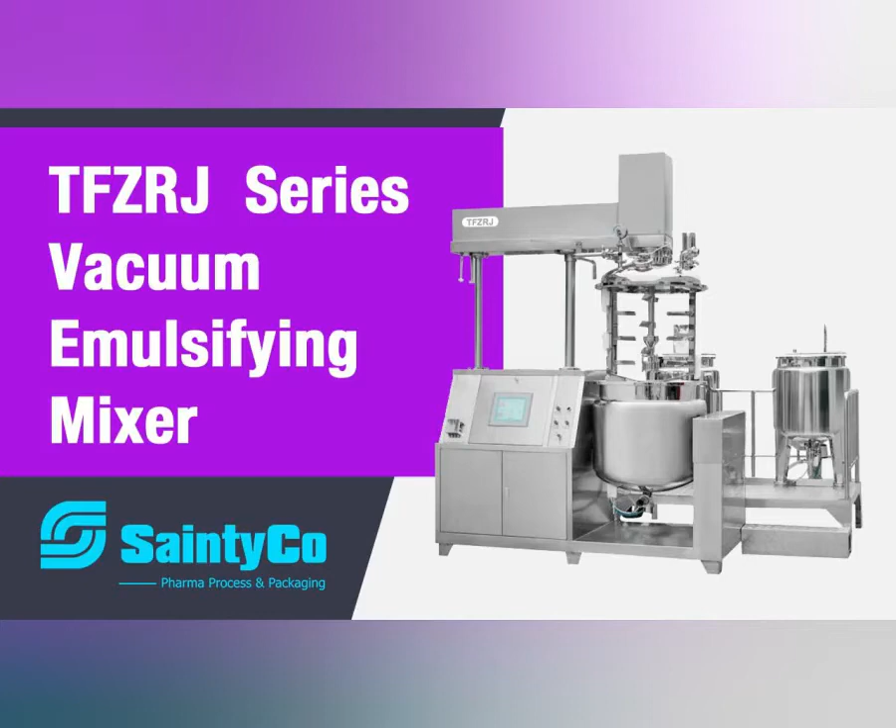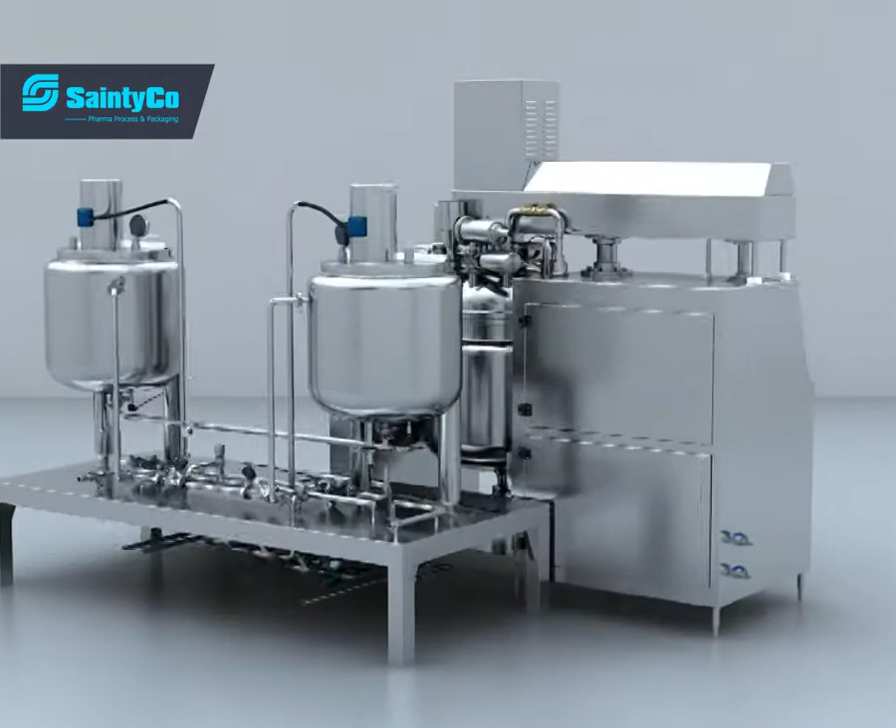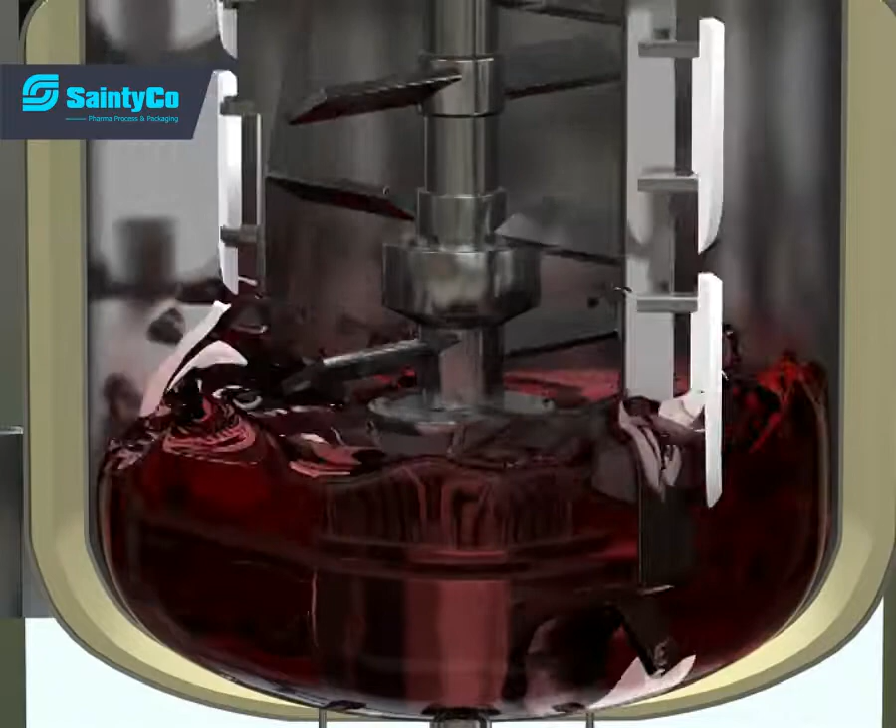The machine has easy operation, steady capability, good homogeneity, high efficiency, solid structure, small volume, high automation level, and is easily cleaned.

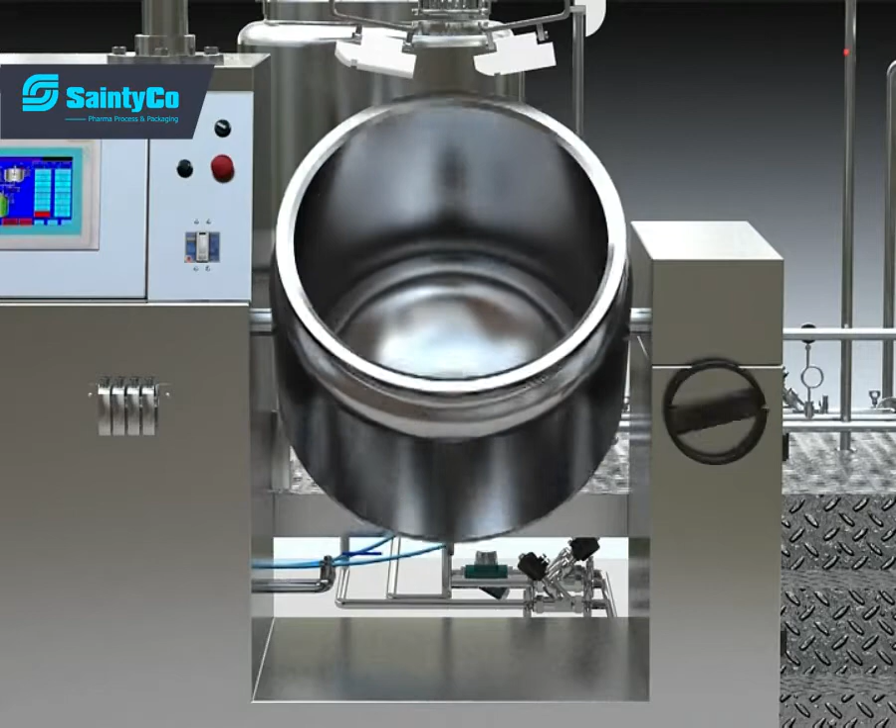The machine is made up of pre-treatment tank, vacuum emulsification blending tank, vacuum pump, hydraulic system, pouring out system, electro control system, and worktable.

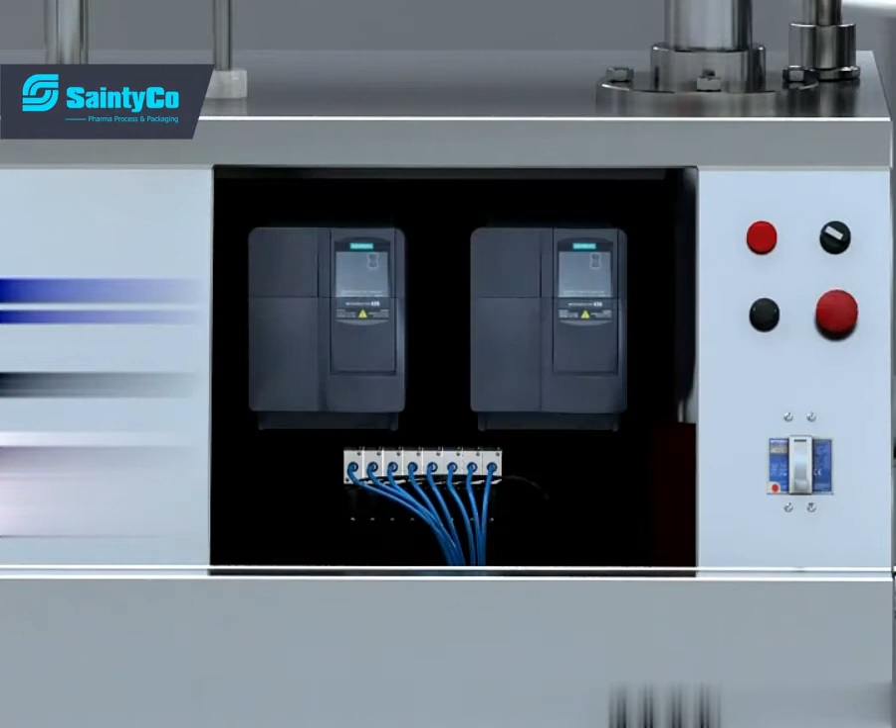The material is made from SUS316L material. Mirror finish of the inside surface is 300 mesh.

Composition of the emulsifier: 1. Emulsifying mixing tank. It has the structure of 3 layers, up and down sealing heads. The down sealing head is connected with the tank by flange, and the thermal protective layer adopts PU foam technique.

There is a high-speed emulsifying mixing device and forward and reverse low-speed mixing device in the tank. At the bottom of the tank there are pneumatic discharge valve and temperature sensor.

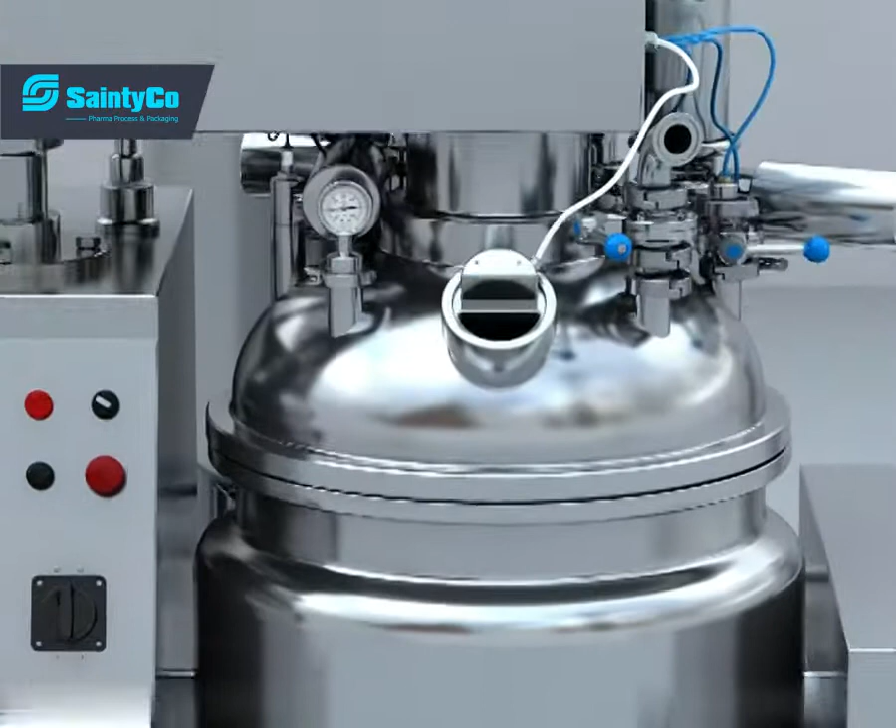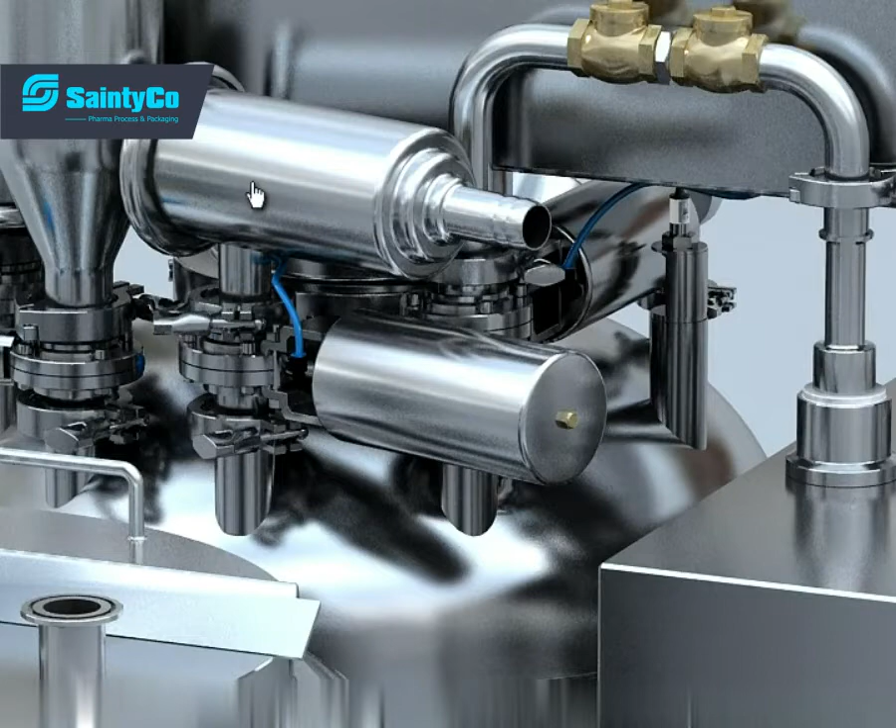On the upper sealing head, there are vacuum sensor, diaphragm vacuum meter, sight glass, CIP purge valve, pressure valve, respiration device, accessories feeding valve, liquid feeding valve, and pneumatic valve for vacuum.

When loading the material to the tank, the low-speed mixer starts mixing the material in forward and reverse directions. The forward blade will make the material go up and the reverse blade will make the material go down. At the same time, the scratch blade will scratch the material which sticks to the tank wall.

Materials are loaded into the emulsifier from the top and bottom of the tank, and will be swung out in the middle by centrifugal force. At the same time, the materials will be cut into very small granules under the effect of the emulsifier head and emulsifier cover.

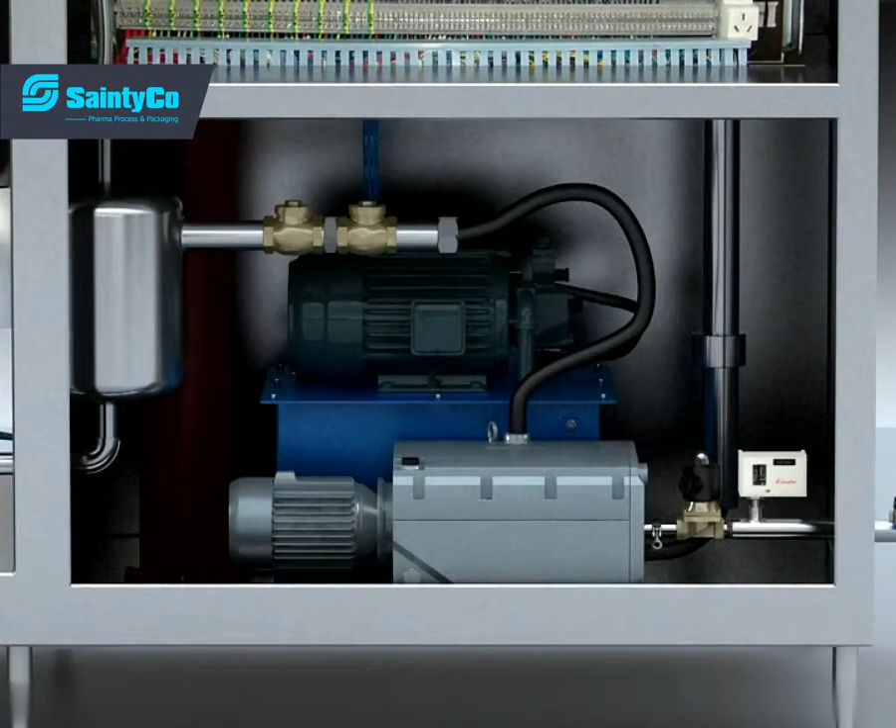2. Vacuum system. It is made up of vacuum pump, vacuum buffer tank, check valve, vacuum meter, water pressure relay, vacuum pneumatic valve, and water electromagnetic valve.

At the beginning of the process, the pressure at the water inlet and air inlet is around 1 atm. When the vacuum pump starts, it will draw the air in the tank through a pneumatic valve, check valve, and vacuum buffer tank. The emulsifier will not cause any foam under vacuum state.

The vacuum meter displays the vacuum degree of the tank, and the vacuum protective sensor will keep the liquid pressure in normal state. 3. Hydraulic system.

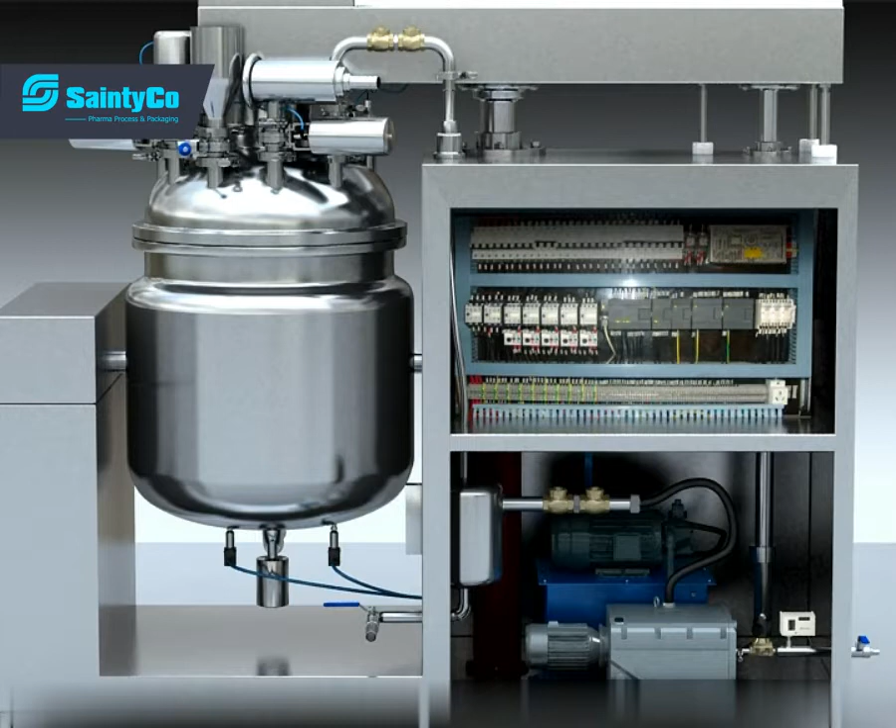It is made up of hydraulic pump, hydraulic cylinder, reversing solenoid valve, overflow valve, upper limit switch, lower limit switch, discharge protection range, and safety switch.

If the emulsifier tank is reset and there's no vacuum in the tank and the safety switch is in this position, then upper and lower sealing heads will start to move up and down.

4. Discharge system. It is made up of discharge hand wheel, worm screw, and worm wheel.

When the emulsifier gets to the upper limit, forward swing the discharge hand wheel until the tank leans to the point that the upper is lower than the bottom discharge limit. Then reverse swing the discharge hand wheel, and the tank will reset to the normal state.

5. Blending system. It is made up of working platform, oil tank, and water tank. The structure of the oil tank and water tank is made of 3 layers.

Upper half open lid, bottom sealing head. The bottom sealing head is connected with the flange-type tank, and the thermal protective layer adopts PU foam technique.

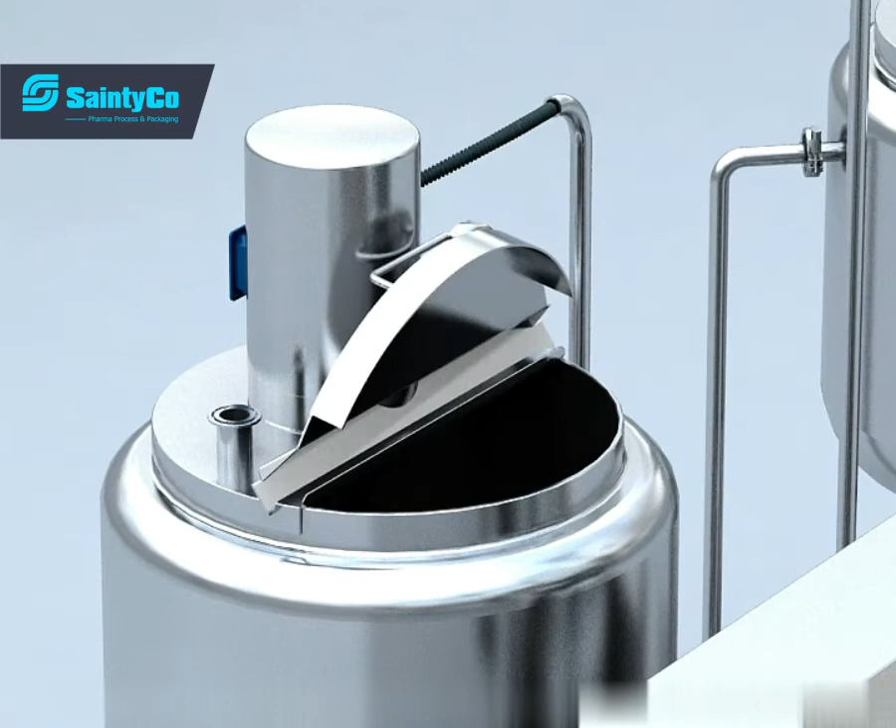After opening the half-open lid, the material must be loaded into the oil and water tank, and then it will start to mix. 6. Pipeline control system.

It is made up of high-pressure stainless steel tube, safety valve, manometer, pneumatic valve, and bleeder. When the steam and compressed air is normal, if the tank is heated, then the condensed water will be discharged from the bleeder after it goes through the pipeline, valve, and the jackets of the tank.

If the tank is cold, then the cooled water will be discharged by the discharge outlet after it goes through the pipeline, valves, and lower hull of the jacket of the tank.

When discharging water, compressed air enters from the jacket of the tank and forces out the water in the jacket. Heat, cold, and discharge functions cannot be active at the same time.

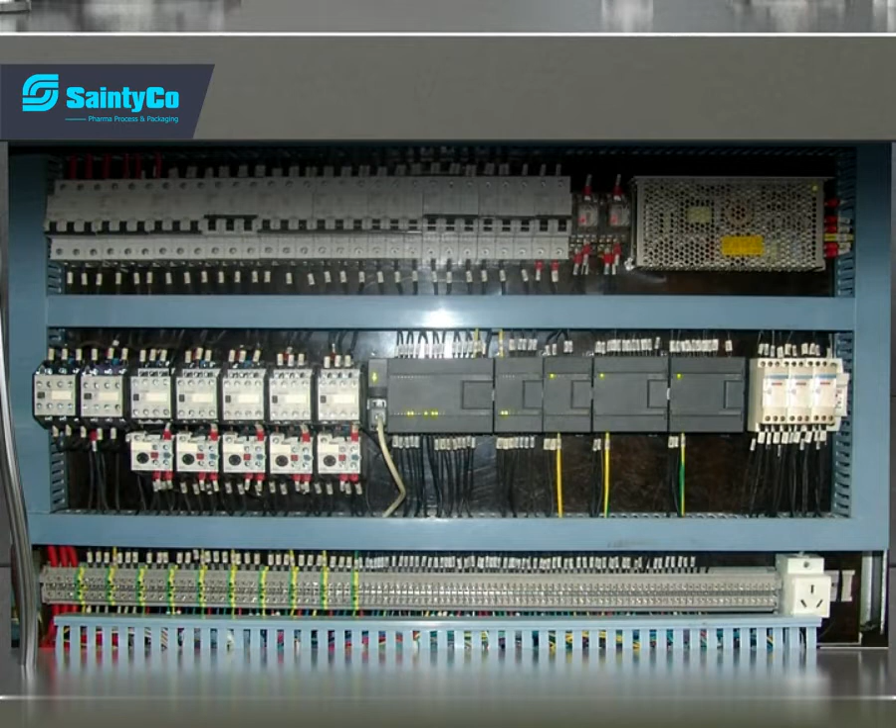It can only process one function at a time. 7. Electric control system. It is made up of PLC, circuit breaker, heat protector, touch screen, frequency converter, temperature transducer, electromagnetic valve. The touch screen will display control screen, parameter set screen, parameter updating screen, temperature curve screen, warning screen, password protection.

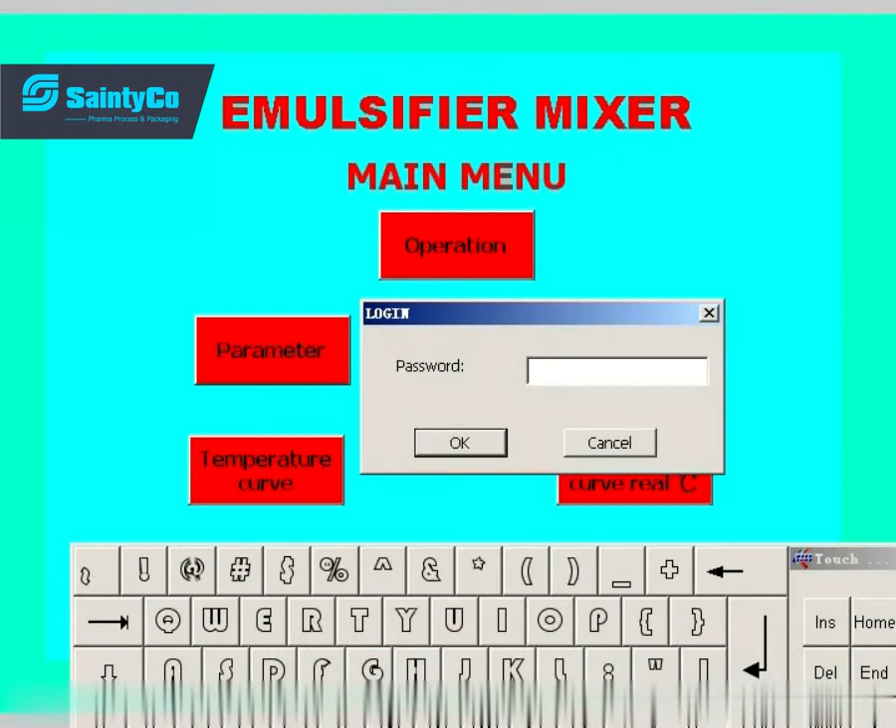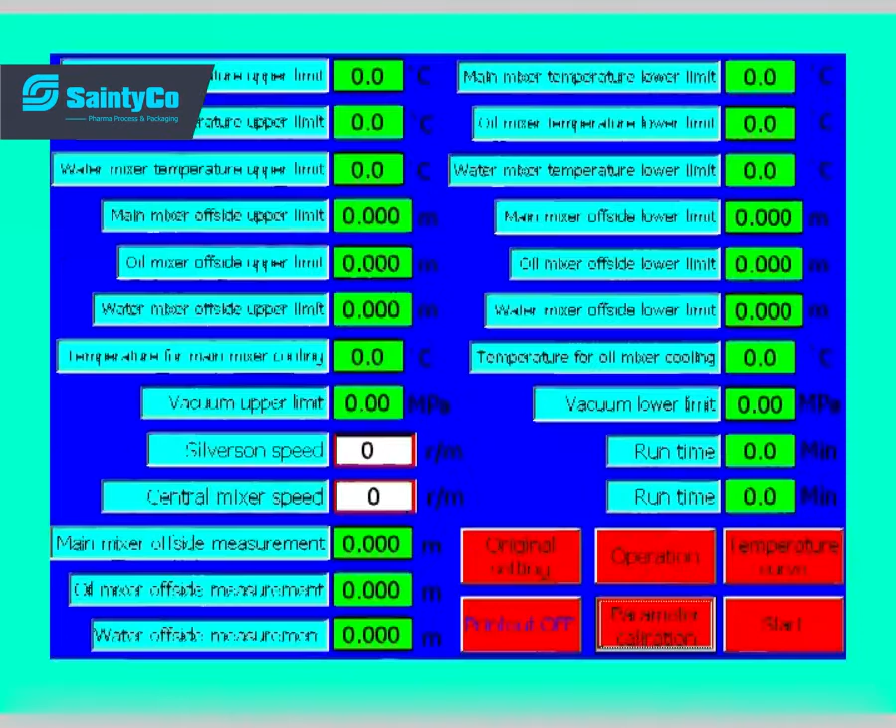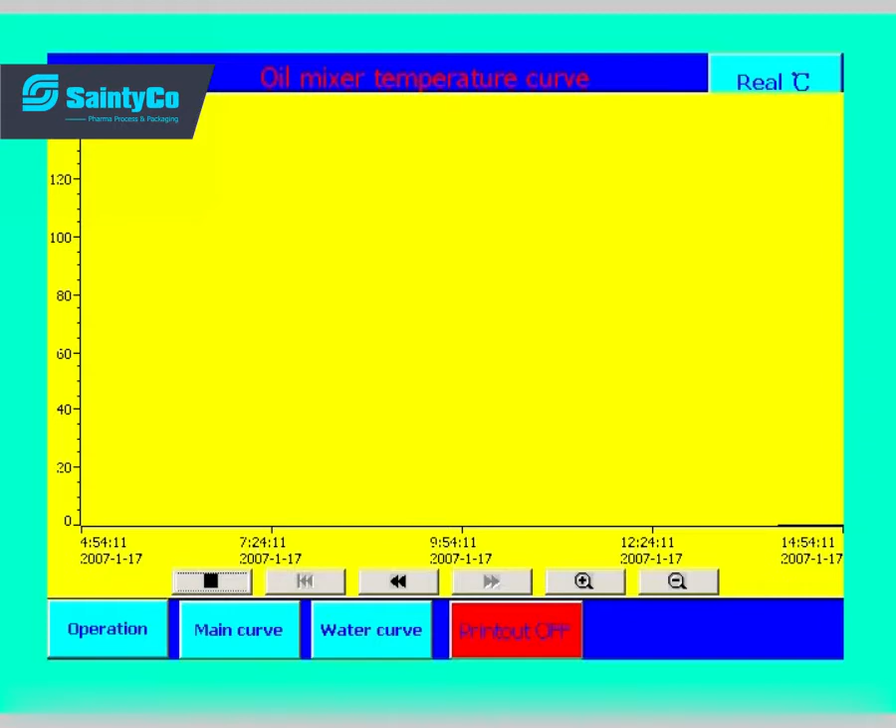On the function screen, we can enter into any screen and make any function control. Parameters can be easily changed from the parameter setting screen. Other parameters and functions are also displayed in the HMI, for example, review of current parameters, temperature of the tank, alarm record, and plotting of time temperature curves.

Installation. 1. Put 6 main machine pads well after the main machine and the working table enter the workshop, and put the main machine on the pad. Then use a level bar to adjust the level of the main machine.

2. Put the working table behind the main machine and put the stainless steel ladder by the side of the working table, and the set of the ladder and the table should be in one line.

3. Connect the stainless steel pipe and compressed air pipe between the main machine and the working table and the wire between main machine and preparation tank room. And connect the steam pipe, water inlet pipe, water discharge pipe, condensed water discharge pipe, compressed air inlet pipe, and wire between the workshop and the emulsifier.

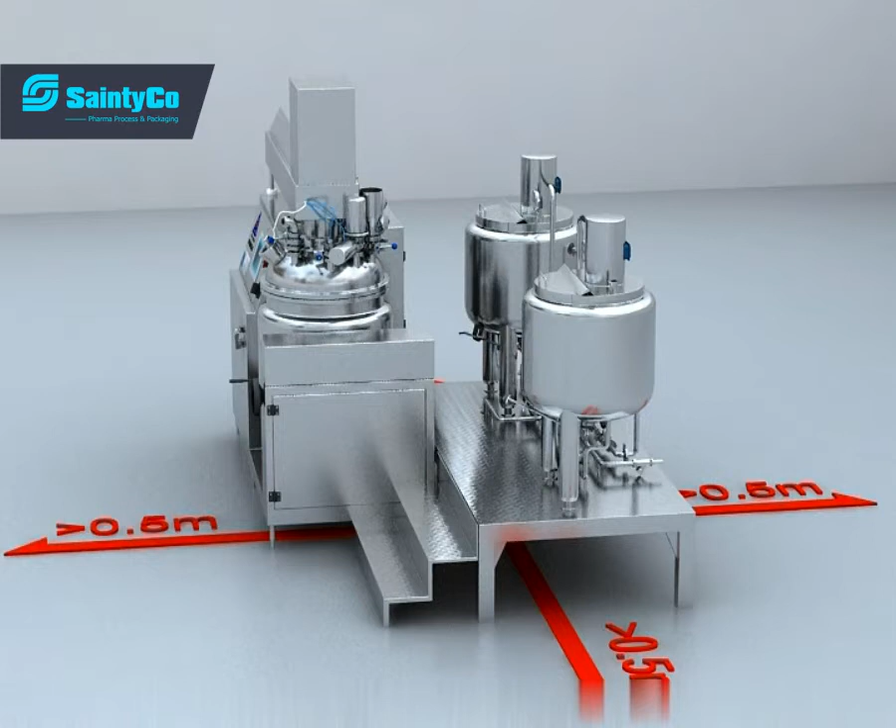4. The emulsifier should keep a distance from the wall at least 0.5 meter, 1.0 meter if possible, in order to do maintenance and ease the clean process.

Operation instruction. 1. Set all parameters on the touch screen after turning it on according to the required batch process.

2. Pre-treatment of material. Load the material to the oil tank or water tank manually according to the required batch process, and then touch the oil tank heat on or water tank heat on, on the touch screen, and the oil tank or water tank will begin to heat.

Touch the oil tank mix on or water tank mix on, on the touch screen, and the oil tank or water tank will begin to mix, and the material to dissolve. Turn off the oil tank or water tank heat and mix button after the pre-treatment, and continue to the next procedure.

3. Material feeding to main tank. Check if the material after being dissolved meets the requirement of the batch process, and then touch the vacuum pump on, on the touch screen.

When the vacuum degree reached -0.06 MPa, open the filling valve of the main tank and the valve at the bottom of the oil or water tank, and the material will be sucked into the main tank under the negative pressure of the vacuum. Close the feeding valve of the main tank and the valve at the bottom of the oil tank or water tank.

Then touch vacuum pump off on the touch screen, and then start low-speed mixing on of the main tank on the touch screen. It will enter to the third procedure.

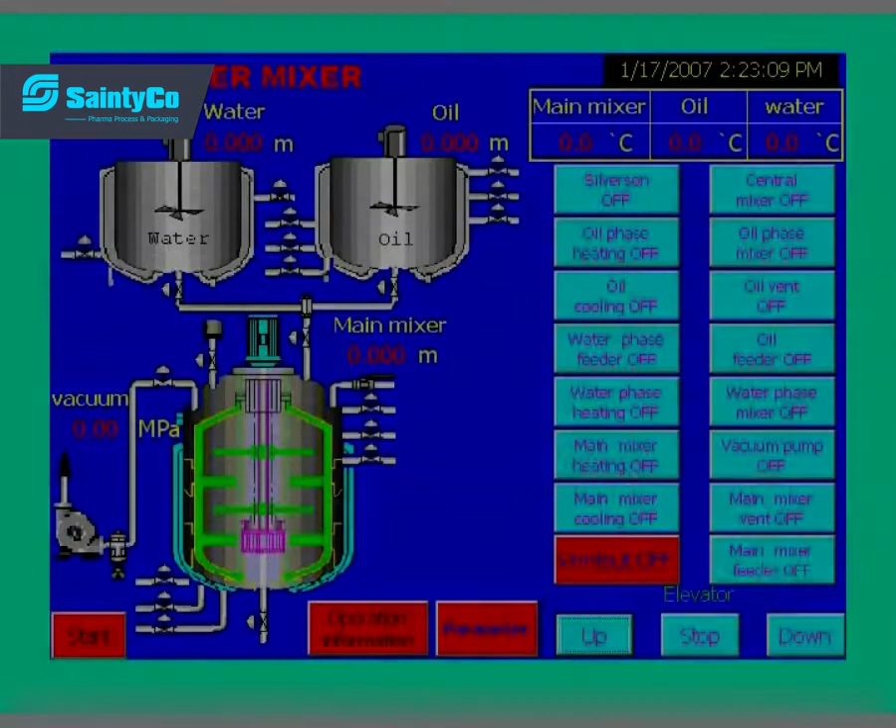4. Feed powder into the main tank. Touch vacuum pump on button on the touch screen and start the bottom valve of the main tank when vacuum degree reached -0.06 MPa.

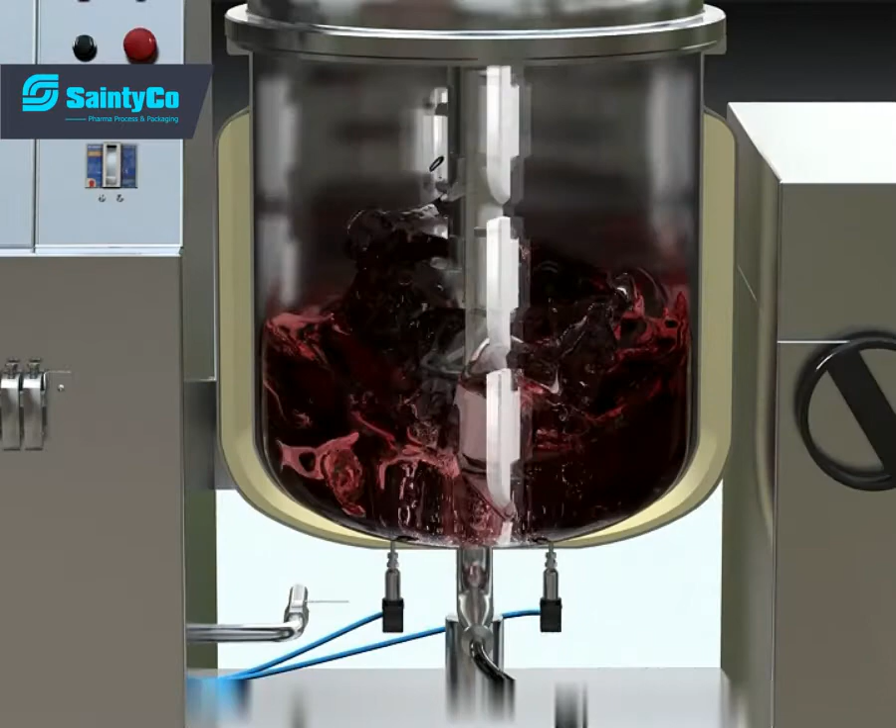The powder will be sucked into the main tank through the soft pipe under the negative vacuum pressure. Close the bottom valve of the tank and vacuum pump after powder feeding. Then touch the vacuum pump off on the touch screen to enter the fourth procedure.

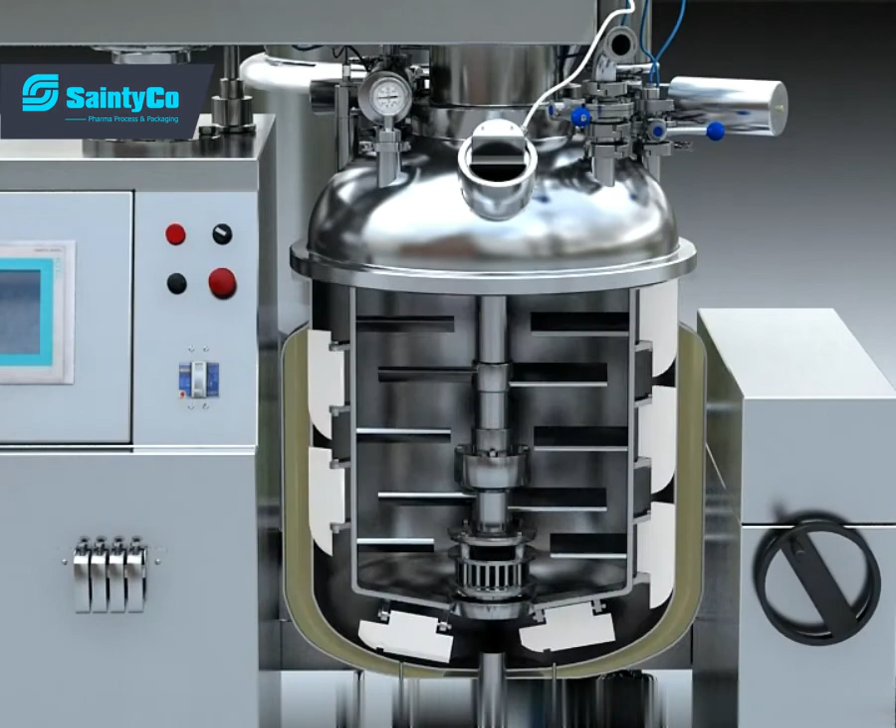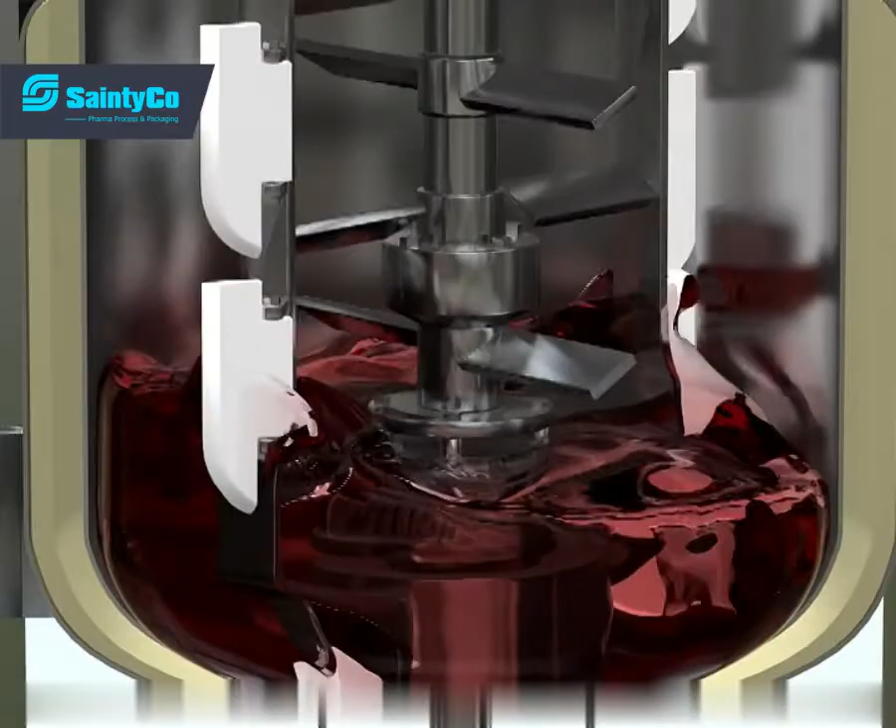5. Homogenizer. Start main tank heat on button on the touch screen after powder has been sucked in, and start emulsifying and mixing on after temperature meets the technical requirements, then continue with the next stage.

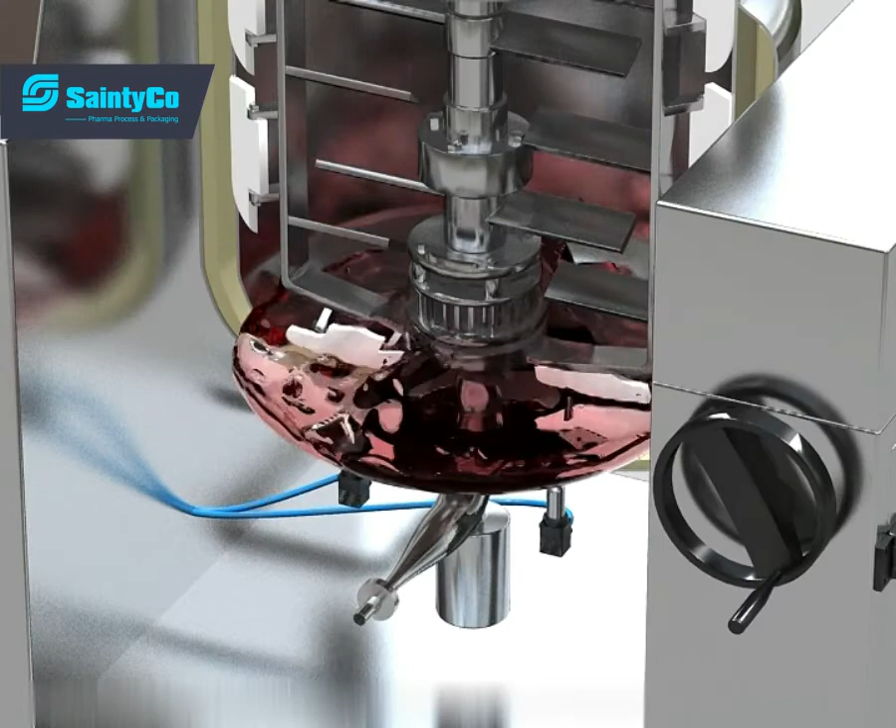6. Positive pressure discharge. Start the discharge pneumatic valve of the main tank and open the manual air valve, and then the compressed air enters the main tank and starts to discharge material. Turn off all the starting system and enter the sixth procedure.

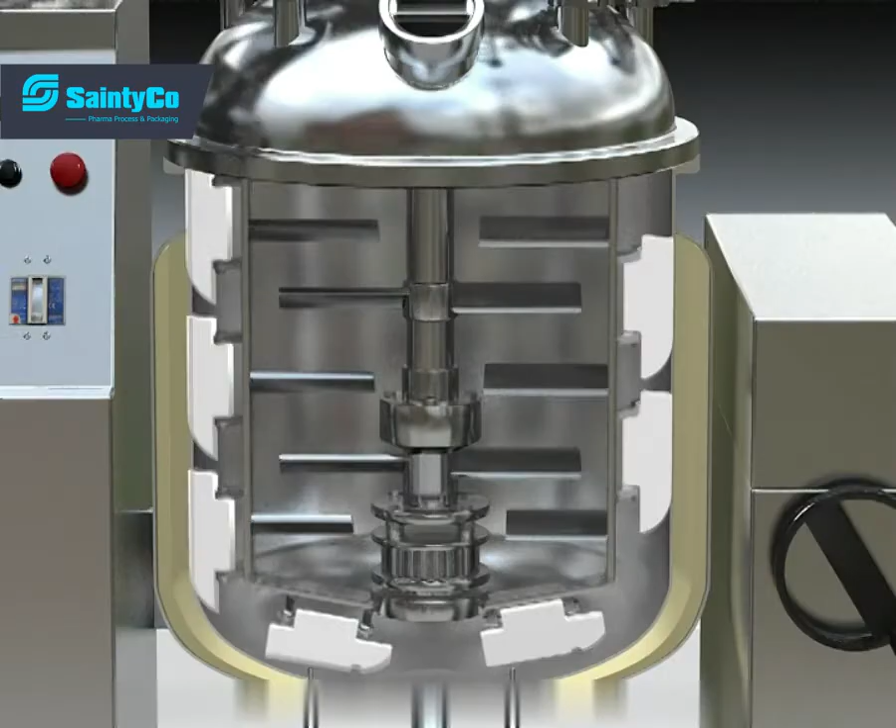7. Main tank cleaning technique. First, connect 70 to 80 centigrade hot water to the CIP of the main tank, and then open the CIP cleaning valve. The hot water will be sprayed in the tank, and at the same time start low-speed mixing.

When the water reaches 1/3 of the tank level, start emulsifying mixing for 2 to 3 minutes. Then turn off all the started system and open the bottom valve of the main tank to discharge the wastewater. After discharging the wastewater, lift the sealing head up and open the upper lid of the main tank for the next manual cleaning.

8. After emulsifier cleaning, make all spots dry and clean. Reorganize the operation room and all appliances. Cut off general power supply, steam, cooling water, and compressed air. Take out the power key and all record documents during the manufacturing.